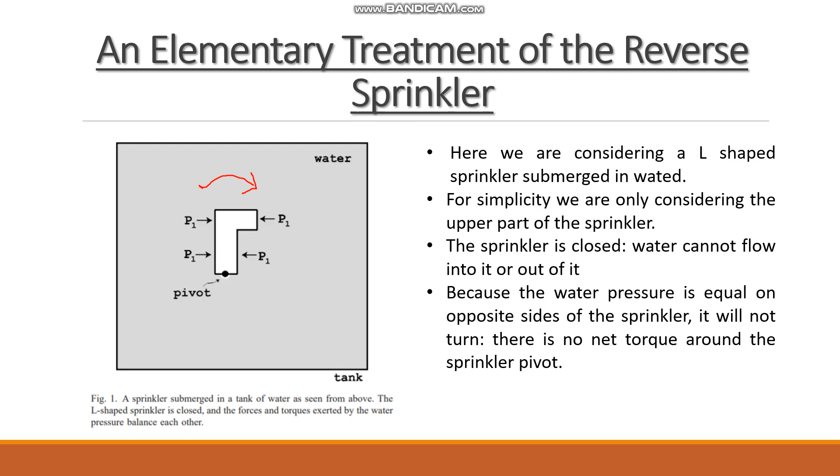Initially, due to the pressure difference, it is to be noted that the sprinkler can no longer remain in equilibrium because the wall on which the water was exerting the pressure at the inlet is no longer there. So due to this pressure difference, there will actually be a force acting on the sprinkler and therefore a net torque in the direction. So if the water is flowing in this direction, the sprinkler will start rotating in this direction because at this cross section area, the pressure is P1 and here the pressure is P2. So as P1 is greater than P2, the sprinkler will start rotating in this particular direction.

However, after some time, when the steady state flow is established, there is another consideration that has to be taken into account, which is the momentum transfer by the water to the wall of the sprinkler. So when the water flows into the sprinkler, it has to turn at this particular bend of this sprinkler arm. So due to this transfer of momentum, which is in a direction opposite to the direction of the pressure forces, there is a decrease in the angular velocity of the sprinkler.

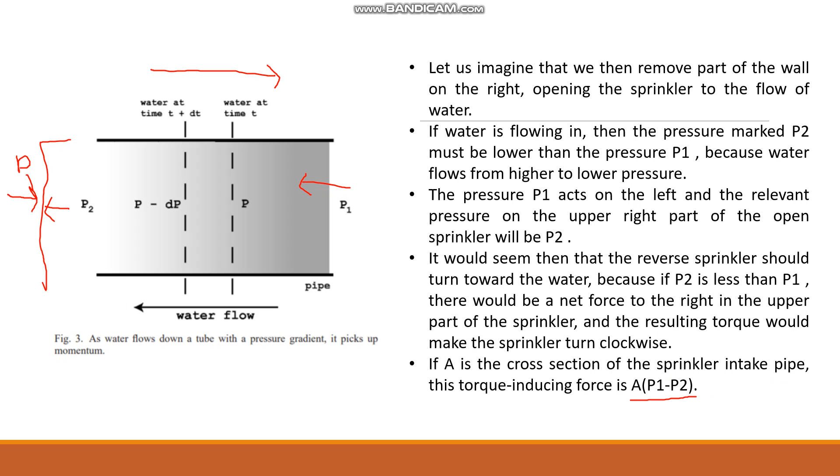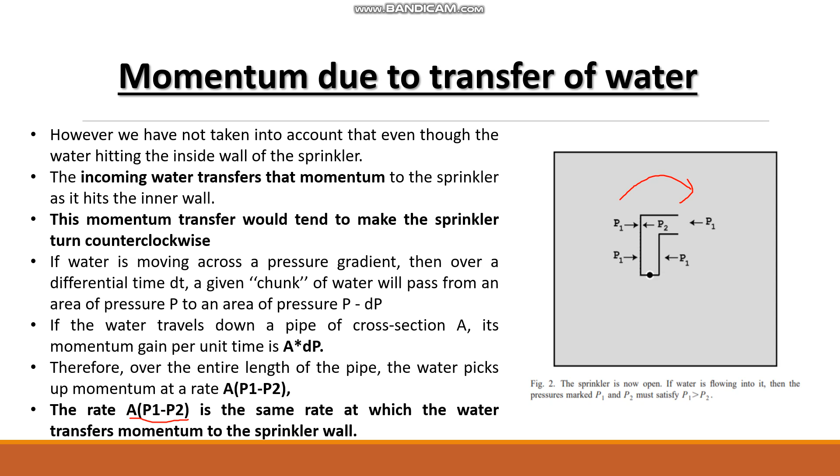And in fact, in steady state, we can find out the force due to the momentum transfer, that is A times P1 minus P2, is actually equal to what we have due to the pressure forces, that again the same, A times P1 minus P2. So these two forces balance each other out, and in the steady state, the sprinkler will rotate with a constant angular velocity. But initially, due to the pressure forces, it began to turn in this particular direction. It will continue to rotate in that particular direction also in the steady state, which is explained over here.

So we can at least qualitatively conclude that in a reverse sprinkler, at least in a steady state, it will experience no torque. However, when the flow is just about to begin, it will pick up some angular momentum opposite to the direction of the incoming fluid because of the difference in internal and external pressure, due to which it will turn in a direction opposite to that of the incoming.

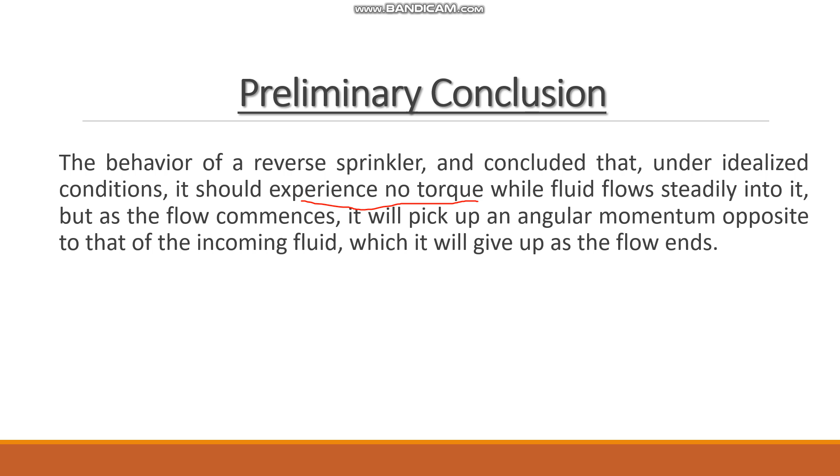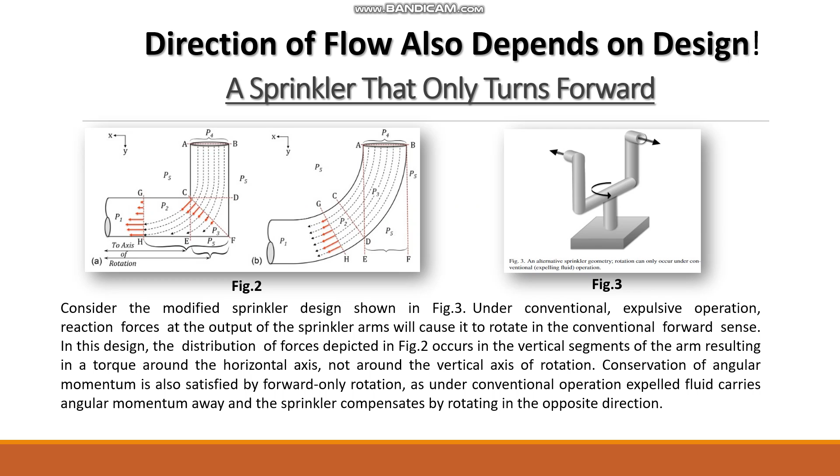So we find that not only does the direction in which the sprinkler turns depend on these two factors, but it would also depend quite significantly on how the sprinkler is actually designed. In fact, it is possible to design sprinklers so that it turns only in a normal sprinkler mode or in the inverse sprinkler mode, or it will not even turn at all. It is possible to do so by configuring the geometry. So this seemingly answers the question of which way the inverse sprinkler turns, which we gathered from the literature.

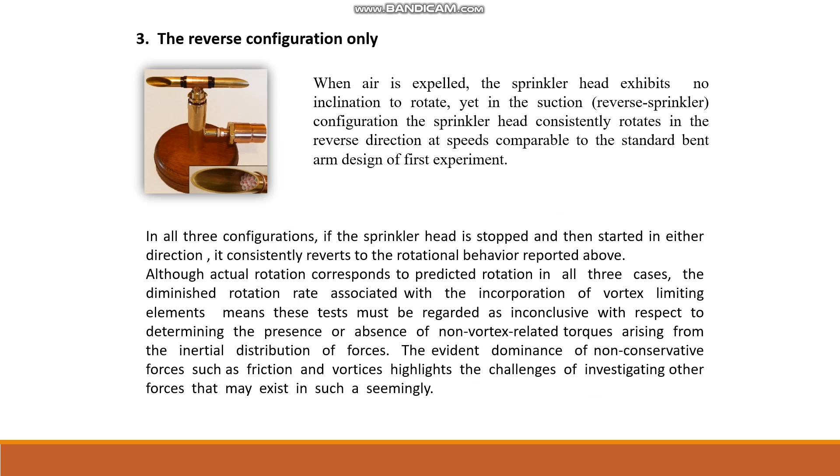However, we decided to go a little further and quantitatively investigate the fluid flow inside the sprinkler arm. So we have tried to analytically model the fluid flow through this sprinkler arm, and then we have tried to simulate it. Here we have one arm of the sprinkler which we are trying to analyze. We are assuming the sprinkler arms have been kept symmetrically about the sprinkler head, so that if we analyze the fluid flow through one arm, we can get a rough estimation of the rotation of the entire sprinkler.

We have assumed in this model that the sprinkler is already rotating clockwise with angular velocity omega and an angular acceleration alpha. Over this is the inlet and this is the outlet. Water flows through the inlet and goes out into the sprinkler head through this outlet. In order to analyze the flow, we have considered two coordinates. One is the xy coordinate centered at O prime, another is the r theta coordinate centered at O.

The length of the tube is L, and in this circular bend, the inner and the outer radius is R1 and R2 respectively. The XY frame, as I have described over here, is a lab-fixed frame. It is an inertial frame of reference. At this particular moment, the sprinkler arm coincides with the inertial frame. However, this r theta frame centered at O is not an inertial frame. It is a non-inertial frame of reference, which also rotates with the angular velocity omega and angular acceleration alpha along with this sprinkler arm. We have considered a material point P, a small fluid particle at a distance r and at an angle theta in the bend of the tube in order to carry out our analysis.

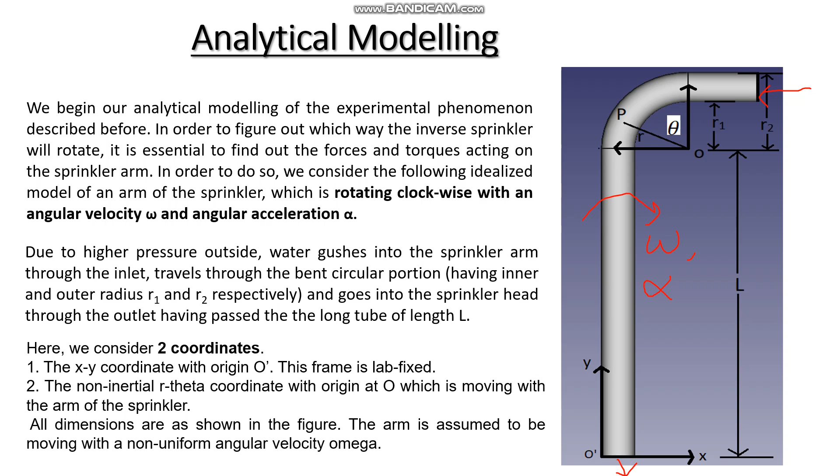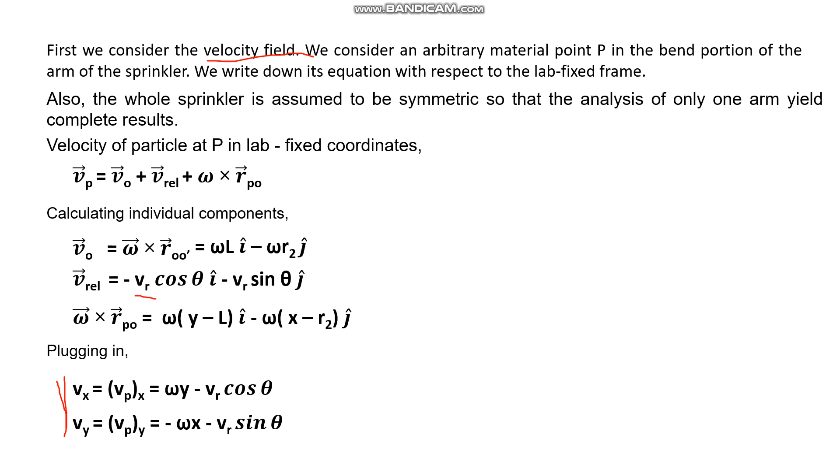In order to do so, we make the important assumption that the flow is both incompressible as well as inviscid. We can safely assume so because we had already previously seen during the experimental analysis that the viscous forces exerted by the water are negligible compared to the pressure forces and any other forces. So as it is inviscid, it can also be safely assumed to be irrotational. And therefore, we can write out these two particular equations. This equation is for the flow being irrotational, and this particular equation is for the flow being incompressible. So from these two equations we will get two partial differential equations, and if we solve them simultaneously, we will get the value of VR.

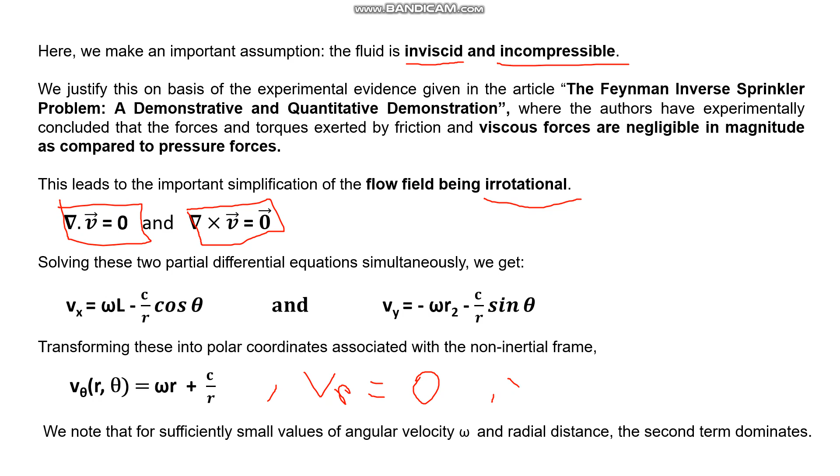So if we plug the value of VR into the expression of Vx and Vy, we will get this expression, where C is an arbitrary constant. And if we describe it in terms of the polar coordinates, we will find out the azimuthal velocity will be given by this expression, omega r plus C by r. Also, the radial component Vr is equal to 0. And as it is a planar problem, Vz is also equal to 0. That is, there will be no flow in the direction perpendicular to the plane of the sprinkler. One important thing to note is that at roughly low angular velocity and small radial distances, the first term can easily be neglected as compared to the second term, that is C by r.

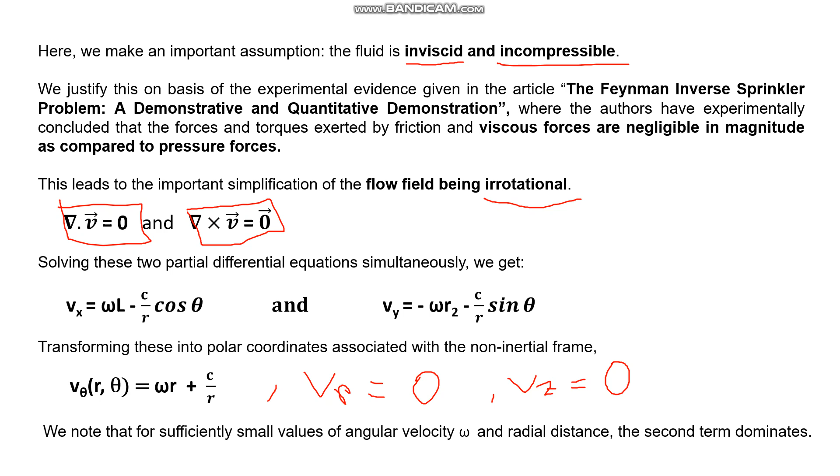Next, we have tried to calculate out the pressure field, the pressure distribution along the base